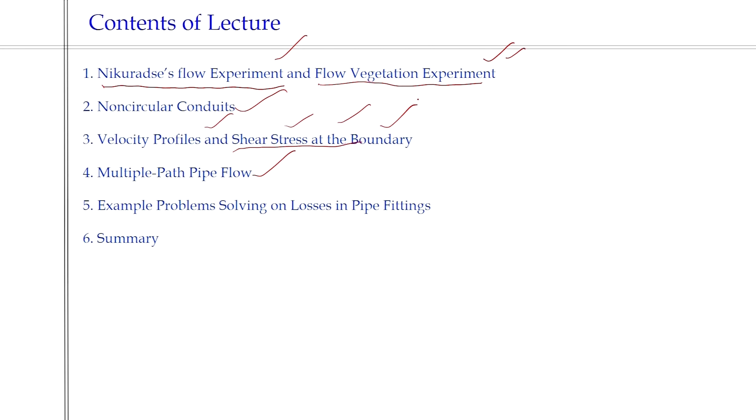Now let us come back to today's contents, what I am going to deliver to you. Very interesting experiments which were conducted almost 90 years back - that is what we will discuss here, and the new experiment we are conducting at IIT Guwahati, a glimpse of which I will show you. Then we will talk about three things: non-circular conduits and how we can apply the same equations for non-circular conduits, how velocity varies in a pipe flow and how to compute wall shear stress at the boundary, and also how to solve multi-path pipe flows. Then we will solve some GATE questions on fluid flow through pipes, and we will have the summary.

Now let us come to the previous lectures, the recap. As shown in these figures, whenever you have any pipe flow components like pumping systems and reservoirs, please draw the energy gradient line and the hydraulic gradient line. Those two lines indicate where the energy loss is happening and where the energy gain is happening. For example, if you talk about a pump, because of the pump's resistance we get extra energy added to the fluid flow through the pipe systems.

That is the reason I repeat this to tell you: first you draw a datum and you have the reservoirs, and from that reservoir you start drawing the energy gradient line and the hydraulic gradient line. The difference between the hydraulic gradient line and energy gradient line is the velocity head, that is V squared by 2g. So on any datum I can have Z as the potential head, then the pressure head, then the velocity head - these three components I can draw as lines like this.

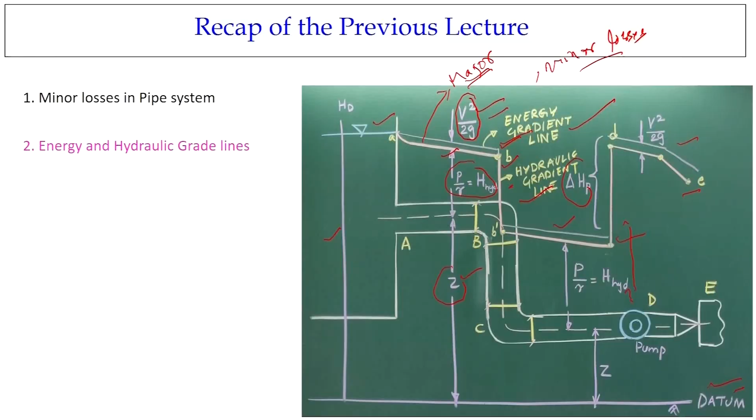Now let us come back to a very interesting experiment that happened in the 1930s, much before World War II. A German professor used to do simple experiments - one of the classical experiments conducted in pipe flows - which helped convert this complex flow into simpler empirical-based energy loss quantifications, velocity distribution quantifications, as well as wall shear stress. If you look at this, any pipe flow can be laminar flow, turbulent flow, or transitional in between laminar and turbulent flow.

The experiment conducted by Nikuradse is based on a very simple concept: take a pipe and put a roughness on it, an equivalent roughness made from sand grains. The figure shown with a 20 times zoom shows that the sand grains are quite random, roughened or placed in such a way that it creates roughness on the wall of the pipe. This roughness is represented as r, the roughness height, and R is the radius of the pipe flow. Because of this roughness, the flow characteristics can change.

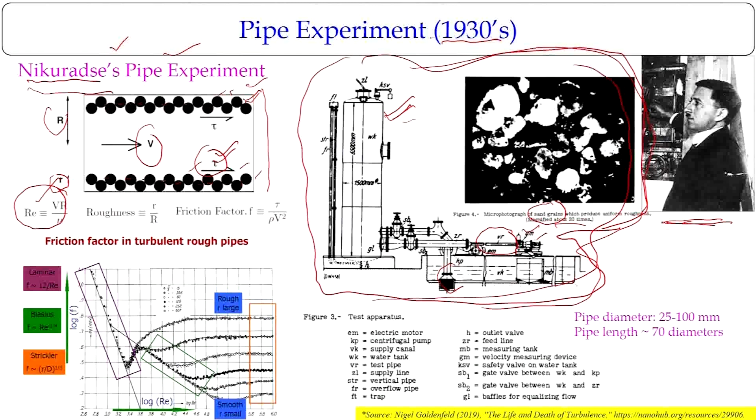As you can understand, this experiment was conducted in the 1930s, and in a remarkable way we got relationships for turbulent rough pipes: friction factor versus flow Reynolds number, which gives us three key cases.

One case is when R and the Reynolds number are both too large, the friction factor becomes a function of R by D, the roughness factor. When the flow is laminar, it is a function of the Reynolds number. And if you have a smooth pipe where the roughness is very small, R is very small, then you follow the Blasius equation, which is a function of the Reynolds number.

By conducting a series of experiments, Nikuradse finally derived the friction factor relations with the Reynolds number, the Moody chart, which we have been using for designing pipe flow networks in industry, water supply, and sewage treatment plants. We still use the same equations developed back in the 1930s from those turbulent rough pipe experiments, since this is still very complex to simulate in CFD.

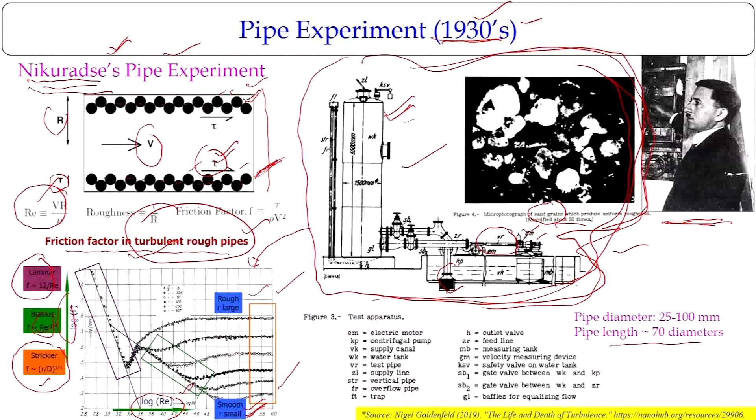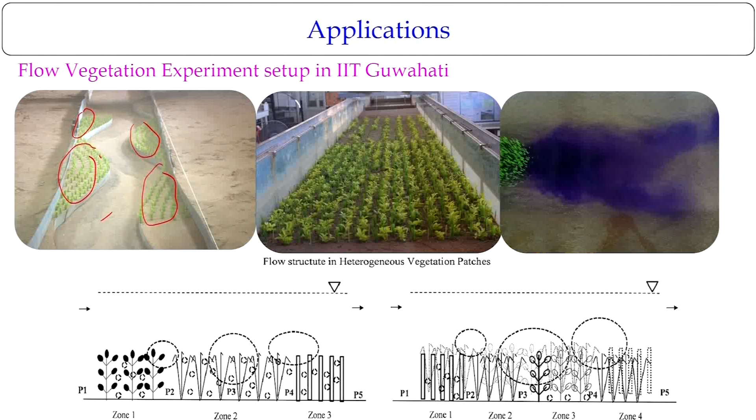Now, coming back to what we have been doing at IIT Guwahati, we do a similar sort of work creating roughness in open channel flow. You can see vegetation being used to create roughness to some degree, and we try to measure the velocity distribution, quantify the wall shear stress and bed shear stress, and measure the water slope.

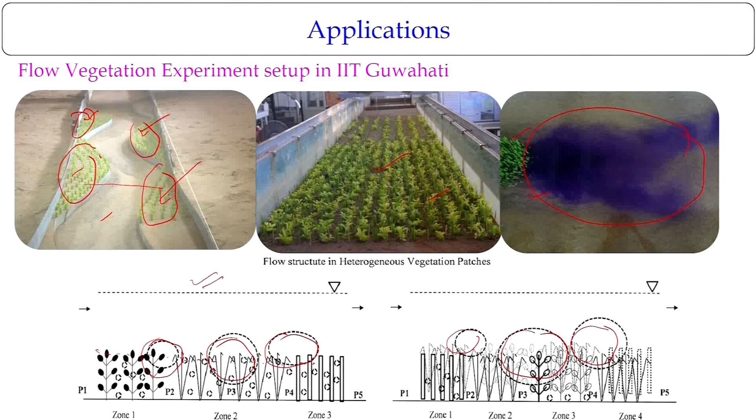We introduced roughness and studied these roughness behaviors and how flow dispersion happens using color dyes. For submerged flow conditions with this kind of roughness, vortices and eddies form, and we can quantify the strength of these eddy formations through a series of experiments in this flow.

So what I want to convey is that experiments give us a lot of confidence for very complex problems like turbulent flow in rough pipes, which is still very difficult to model in CFD software. But by conducting a series of experiments, we can establish empirical relationships, and these empirical relationships are generally used in industry to design pipe networks.

Now coming to another case: many times we do not deal only with circular conduits or circular pipes from one point to another. When you go for a non-circular case, you need to define an equivalent flow diameter.

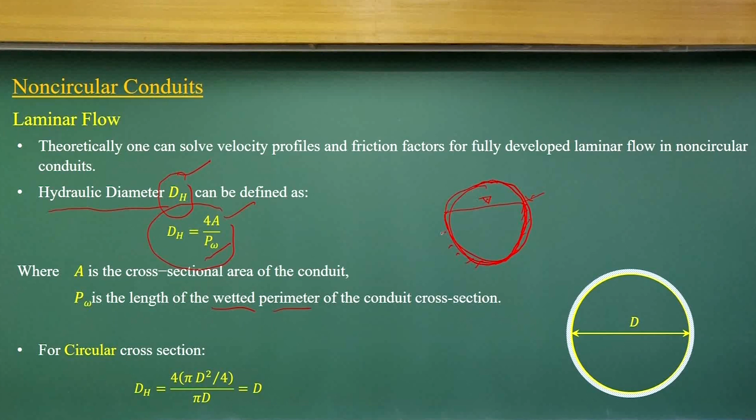So that means we introduce a hydraulic diameter, which is a function of area and wetted perimeter. The part of the perimeter which is under wetted conditions is called wetted perimeter. For example, if the flow in a pipe is full, the total perimeter is considered the wetted perimeter. But if the pipe flow is half filled, I will consider only the wetted part. I am highlighting that we need to consider the wetted perimeter and the area to compute the hydraulic diameter.

As equivalent diameter we can get it. For circular sections, if you substitute D as the diameter and the perimeter for the full flow of the pipe system, you get the hydraulic diameter in a circular pipe when it contains full liquid flowing through it, equal to the geometric diameter. So that is how equal components come for that. Please do not be confused - the hydraulic diameter is an equivalent diameter representing other non-circular conduits.

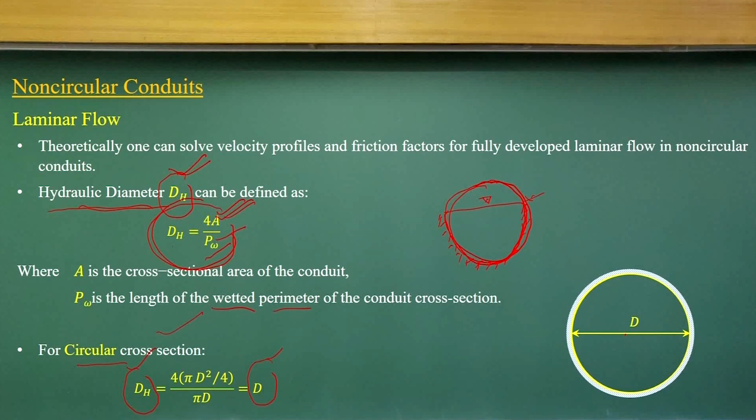Now come back to the non-circular conduit, like a condition where flow passes through a circular annulus. You have D1, D2 and flow through these. You can easily find out what will be the flow area and the wetted perimeter for both cases, which gives the hydraulic diameter. Similarly, if I have a rectangular cross section and flow through it, I can define the area and wetted perimeter, which gives the hydraulic diameter.

If you have an isosceles triangle with 2 alpha degrees between sides R, I can also numerically determine the area and the perimeter, and get the hydraulic diameter for these cases.

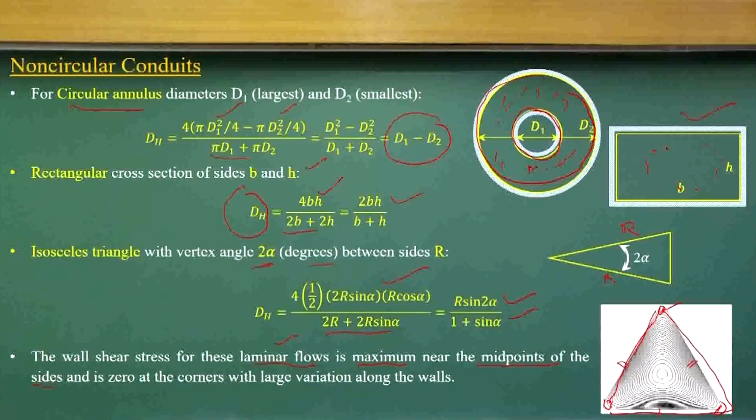Now let us come back to non-circular pipes, like if you have a pipe of triangular shape. In this case, if you have laminar flow, the wall shear stress will be maximum near the midpoint of the sides, and it will be zero at the corners. More details I am not going into since it is undergraduate level and we did not discuss much detail of flow patterns for complex geometry like isosceles triangles - you can see the maximum wall stress develops at the midpoint, and it is zero at the three corner points.

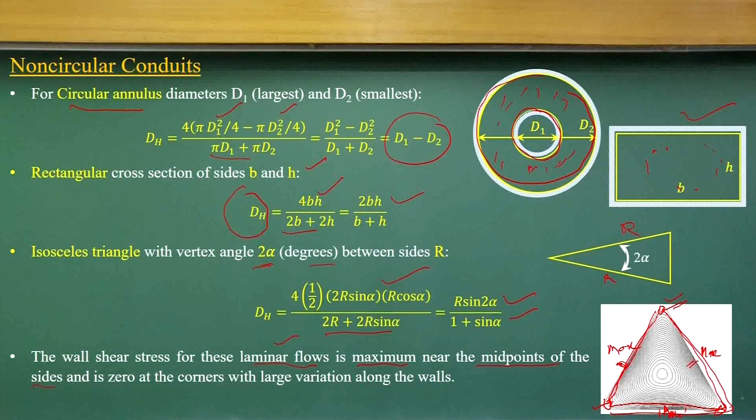Now if you look at turbulent flow, the velocity distribution as well as the wall shear stress distribution changes. Even for turbulent flow we use Moody's diagram, replacing D with hydraulic diameter, to quantify the energy losses. The wall shear stress is zero at the corners, as already told in the laminar case. Along the side, the wall shear stress is close to uniform, not maximum at the midpoint as in laminar flow. This is the flow behavior observed by conducting a series of experiments quantifying the velocity distribution and wall shear stress.

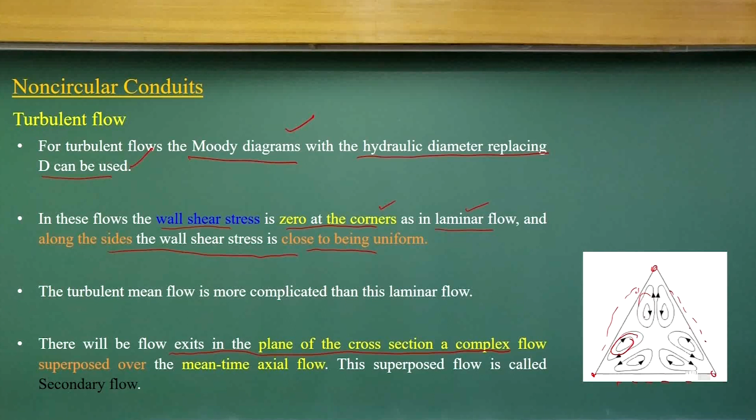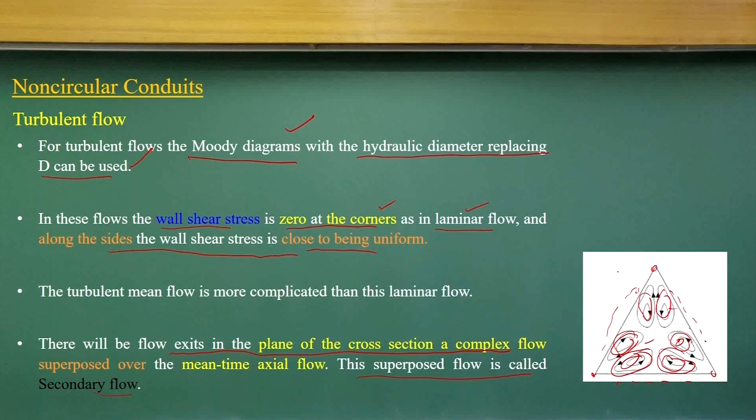Now if you look at this type of flow, you always have vortex formations. These vortex formations are called secondary flow generations, and they are responsible for mass exchange and momentum exchange through the flow system. As you go away from circular pipes, for a case like triangular flow zones, you have a more complicated velocity distribution and shear stress distribution compared to circular pipes, which are symmetrical problems that we try to understand.

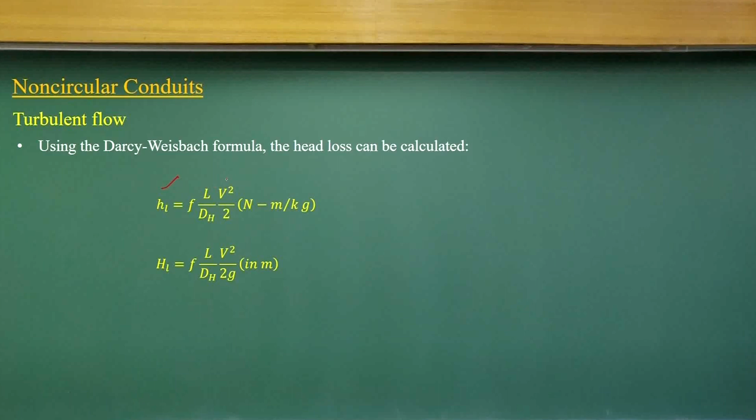Now coming back to turbulent flow, again we can follow the same head loss equations. The head loss is a function of the velocity head, which is L by dH, where dH is the hydraulic radius, L is the length, F is the friction factor, and we can compute the energy losses.

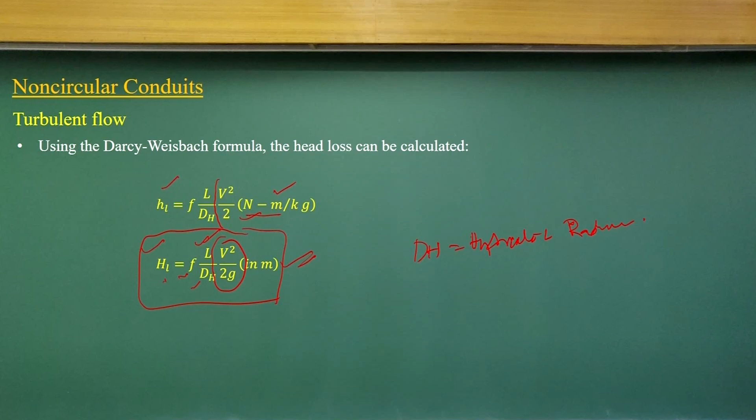Most often we use these because this gives the energy losses in terms of meters, but we can use these functions which give us terms of Newton meter per kg. So we divide by the acceleration due to gravity, we will get it in terms of meters.

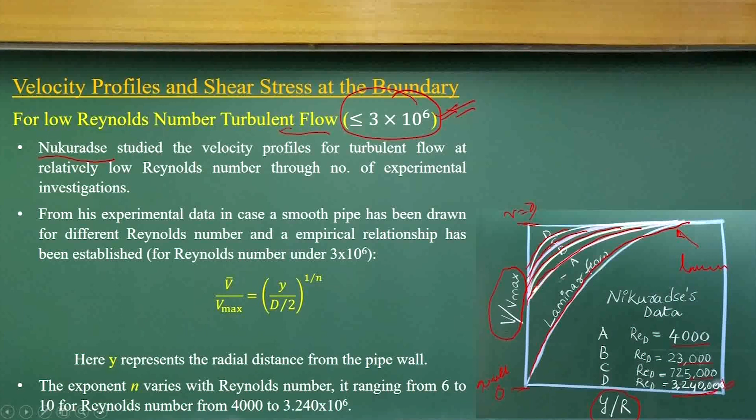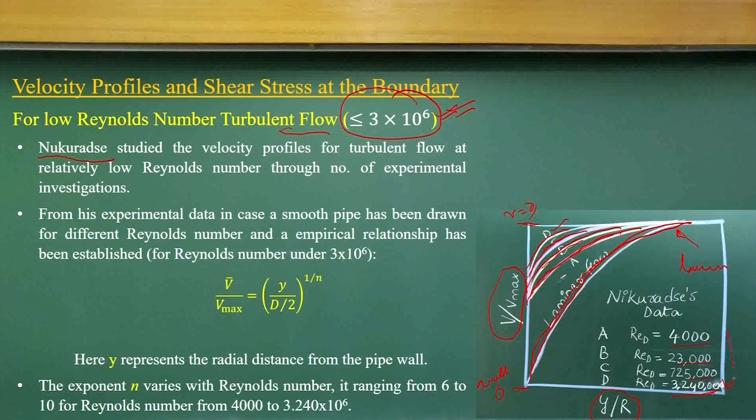In case of laminar flow, you have a velocity distribution like this, but in case of turbulent flow, the velocity distribution changes as we increase the flow Reynolds number. So to quantify the relationship for this type of velocity distribution v by v max, it establishes a relationship with y by (d by 2), or y by radius, to the power 1 by n.

It is fitted with a data curve, and finally we find that n varies with the Reynolds number. Its range is from 6 to 10 for Reynolds numbers from 4,000 to 3.2 million. So in this case n varies considerably from 6 to 10. This n is a function of Reynolds number.

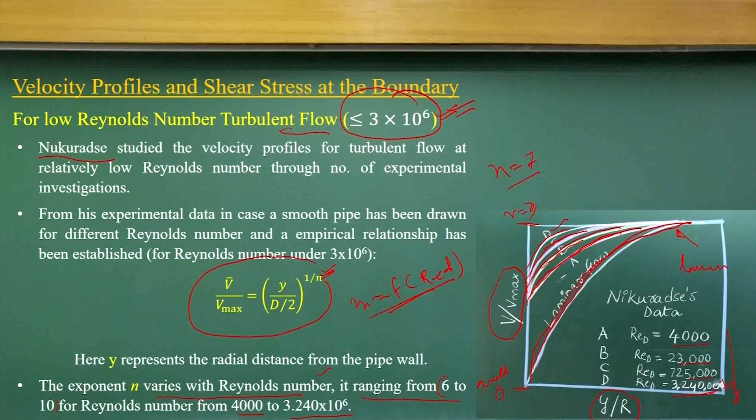But in many cases n is considered as 7, so many times it's called the 1 by 7th rule for describing the velocity distribution in a pipe flow for turbulent regions. But when you look at what could be the shear stress, that is the wall shear stress at the wall of the pipe.

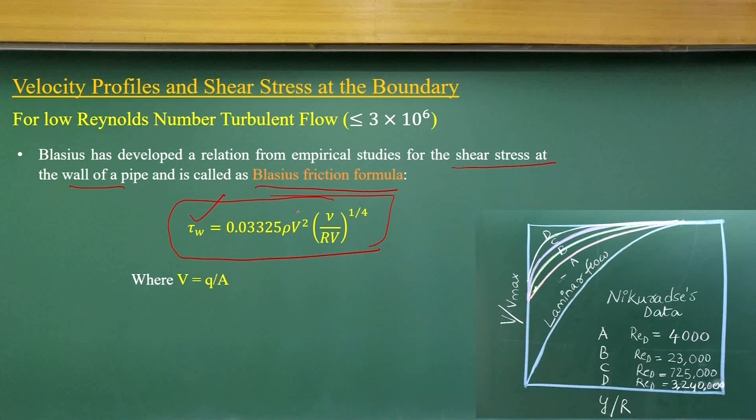That is also empirically established as a function of wall stress, the average velocities, hydraulic radius, and the kinematic viscosity. That is developed to compute the wall stress from experimental data sets. From experimental data sets it is derived, that's why it's called empirical studies. The wall stress relation with average velocity, kinematic viscosity, and the R value gives the wall stress for a circular pipe.

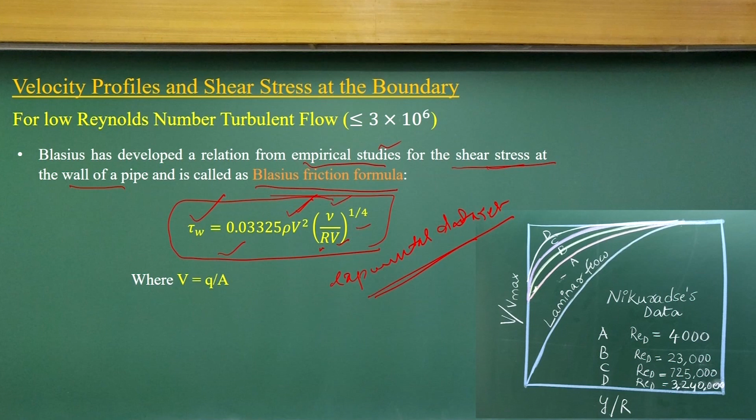Now if you look at it, when you go for higher Reynolds number turbulent flow, more than 3 million, what actually happens—I am not going into more details—is that when you have Reynolds numbers more than 3 million,

then certain zones of the velocity profile develop. Like at the wall, you can see there will be a flow which behaves like laminar flow, like a viscous sublayer. And as you go to the outer zones, you will see a velocity profile develops which does not have a linear relationship. In laminar flow, there is a linear relationship between shear stress and velocity distribution, but that does not happen when you go to the outer zones.

And in between there is an overlap zone formation. In this lecture we are not going into more details because I have not introduced the boundary layer concept yet, but try to understand: when you go for higher Reynolds number flow, you will have a very small thickness near the wall where the flow behaves like a layer dominated by viscosity—that's why you have viscous sublayer zones. But as you go far away from the wall, you will have a turbulent velocity profile zone, and experimentally it's established that this change of regions happens as we go away from the wall.

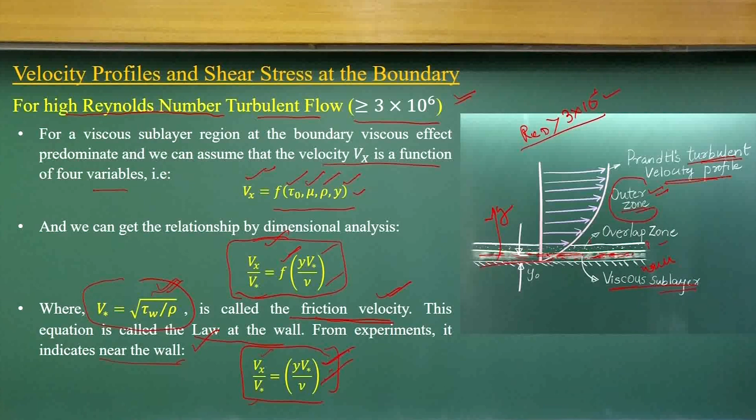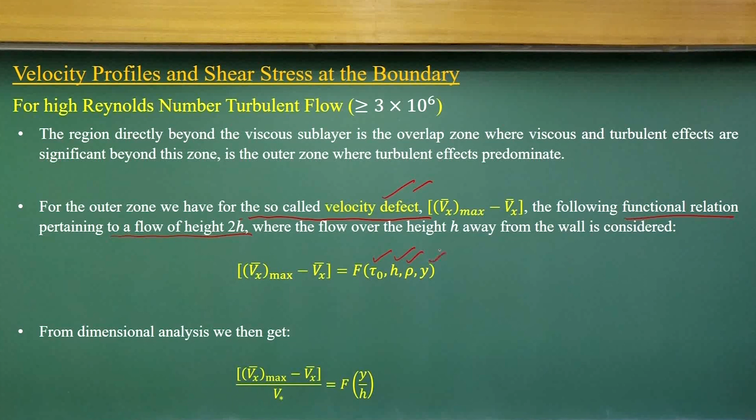But if you go to the outer layers, we look at the velocity defect concept: how far the velocity is from the maximum velocity, meaning how much deviation or difference there is. Looking at the functional relationship with shear stress, H, rho, and y, we again get similar functions from dimensional analysis between V, y, and h.

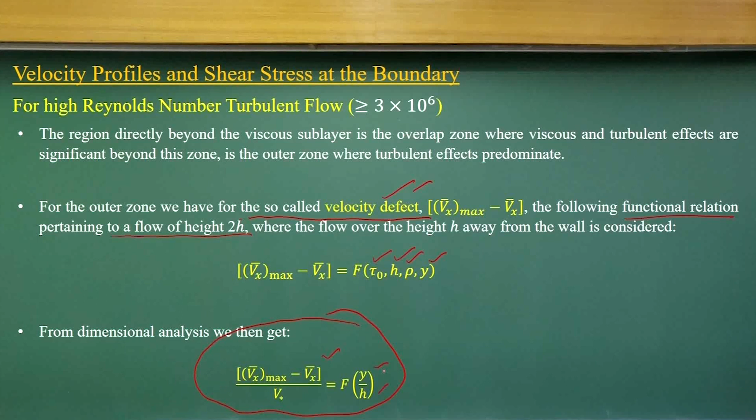Now, for high turbulent flow, this region is called the velocity defect zone, and h is replaced by r, the pipe radius. Then you get these experimentally derived components, where alpha equals 0.4, representing how the time-averaged velocity and spatial average velocity fluctuate with shear velocity. In the overlap zone, you get this equation.

From experiments and dimensional analysis using the Nikuradse experiment dataset, it was found that alpha equals 0.4, and for the overlap zone, alpha and B take different values—this is called the logarithmic overlap layer. Between these two regions, we can look at how the velocity distribution behaves.

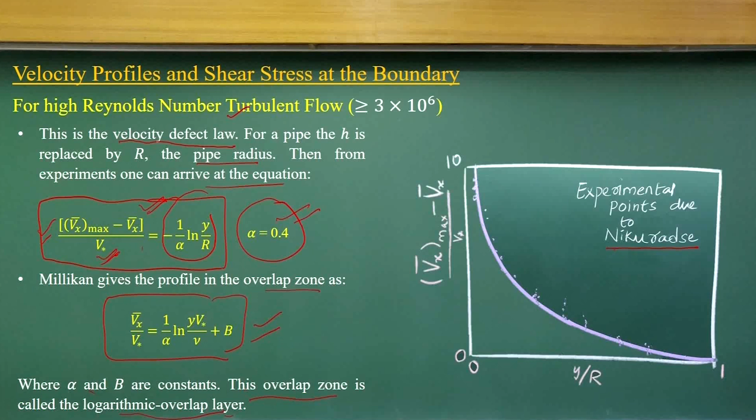Now coming back to a very simple example, which is necessary and found in your textbook: many times you have pipes in series, pipes in parallel, or three-reservoir junction problems. Pipes in series are very simple problems, like electric circuits.

You can have a series of pipes, like wires, from point A to B. If you have that, definitely the discharge will be equivalent for steady flow conditions, so Q1, Q2, Q3 should be equal since it's steady state.

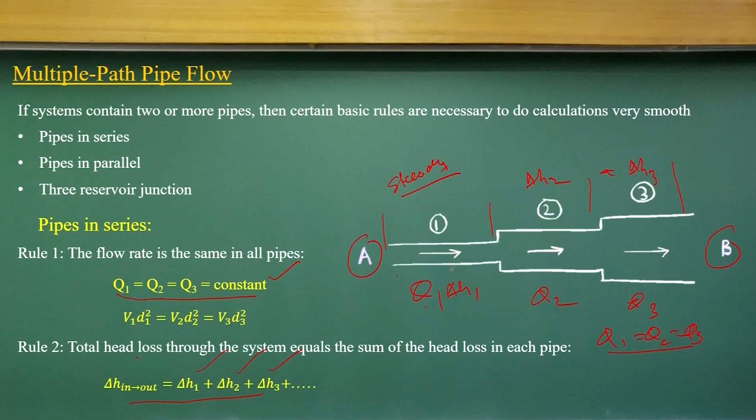But there are energy losses: delta H1 is the energy loss for one region, delta H2 for another, and delta H3 for another. The total energy loss is the sum of delta H1, delta H2, and delta H3. So pipes in series is a very simple problem where flow is constant, but total head loss is the sum of head losses of individual pipes connected in series.

But when you have pipes in series, remember to always consider whether there are minor losses. There are major losses, which are the frictional loss component for pipe 1, and also minor losses due to changes in pipe diameter—expansion, contraction, exit loss, entry loss. You have to look at how the flow is happening and quantify the minor losses.

So this is major loss plus minor loss, representing pipe 1, pipe 2, and pipe 3 respectively. Similarly, with more pipes, you just sum the head losses along pipe 1, pipe 2, pipe 3. Most of the time, since the same discharge flows through, V2 and V3 will be proportional to V1 as functions of that same discharge.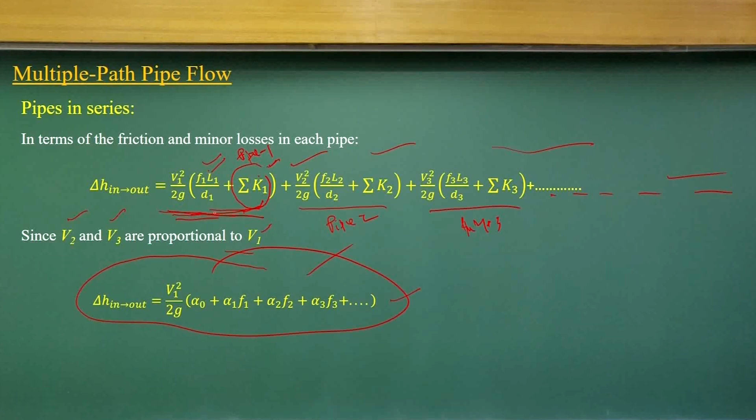So, you can write a simple formula like this, V1 square over 2G, and have constants with this value. These are shortcut ways to do it, but I always encourage you to follow the energy losses computations for major losses and minor losses, compute the total, then find out what could be the energy losses happening in a pipe in series conditions.

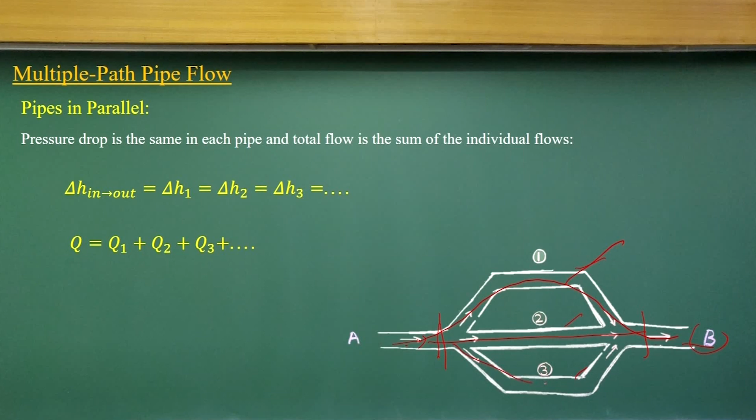Now, if you look at another very simple problem, pipes in parallel. When you have pipes in parallel, you can understand it: if I have 3 pipes connected here, this is A, the entry point, B is the exit point. From this point to this point, the total energy losses passing through path 1, path 2, or path 3 should be equal.

So, energy losses should be equal, whether it follows path 1, path 2 or path 3, all the energy losses should be equal. That is the condition. As the flow comes and divides into 3 parts, we can write Q1, Q2, Q3, and QT will be the sum of Q1, Q2, Q3. So, the sum of discharge will give us the discharge passing through A or B, and the energy losses, whether following path 1, path 2, or path 3, should be equal.

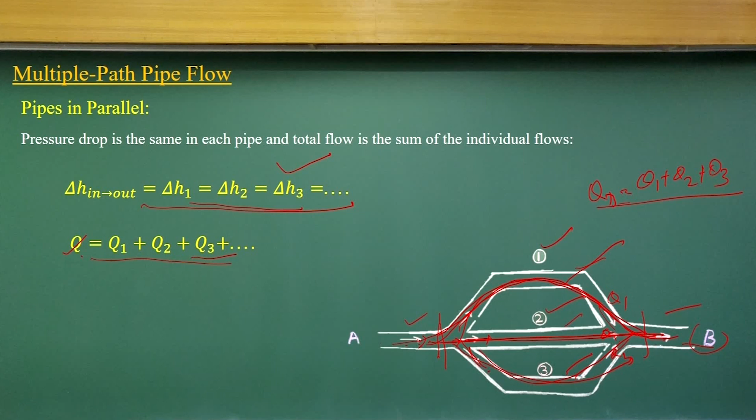Then the energy at these 2 points will come to the same value, although it would not be possible to have different energy losses, that cannot happen in a flow system.

Now, if you look at the 3 reservoir junction problem, which is given many times, you have multiple reservoirs, multiple water tanks connected to 3 flow systems, and you have a junction where 3 are connected. Out of these 3 flows, one could also be outflow. We do not know in which direction it will be outflow, but we can say that the sum of Q discharge should be equal to 0 at this point, since there is no outlet. So, at the junction point, the continuity equation or mass conservation at this point should be equal to 0.

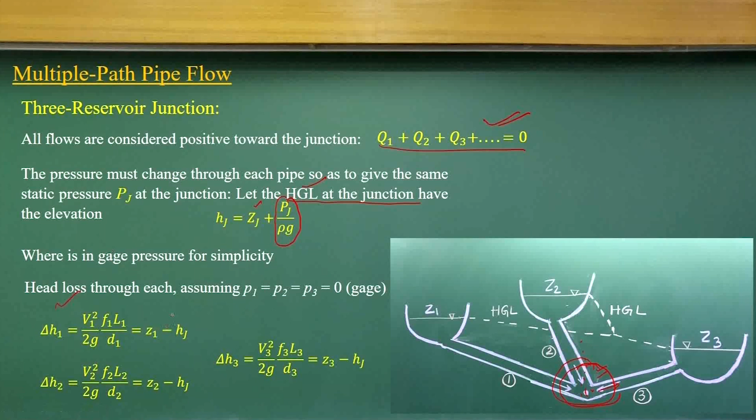But another thing you need to compute is how much energy or head there is, what is the elevation of the hydraulic gradient line, that is ZJ, and the pressure head part that comes. This hydraulic gradient is supposed to be equal to the change of energy. We have this energy gradient line at this point, and I know the hydraulic gradient line at these points. If I look at how much head loss is happening, the pressure head is equal to 0 here, the velocity head equal to 0 here.

So, this is the energy gradient line, also the hydraulic gradient line. Looking at the line of hydraulic gradient, not the energy gradient line, since I am not looking at the velocity point, that should be equal at this point after having the energy losses. That is, Z1 minus HJ should be the energy losses. Similarly, Z2 minus HJ should be energy losses, Z3 minus HJ should be energy losses. So, the energy losses will happen in such a way that we will have a hydraulic gradient at the junctions.

That is what we apply, with losses, to compute the head losses in this direction, in this direction, and in this direction. Based on that we can compute the flow contributions, Q1, Q2, and Q3 directions. So, you have 3 equations here, and these equations help us find the flow directions and the head losses of the 3 reservoir junction problem.

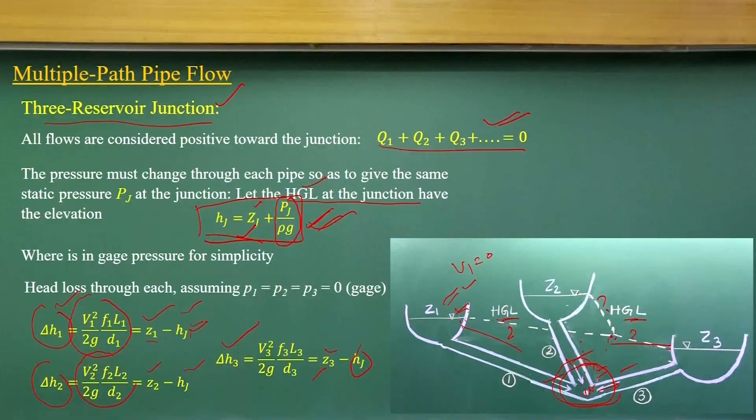This is quite an interesting problem, but try to understand that we are computing the hydraulic gradient line and its location at the junctions, and based on that we are equating the energy losses to compute that part. That is the basic component.

Now, come back to example 1, which is a GATE 2014 question paper, which looks very lengthy, but it is a very simple problem. An incompressible fluid is flowing at a steady rate in a horizontal pipe.

From a section, the pipe is divided into 2 horizontal pipes given as D1 and D2. D1 is 4 times D2, running for a distance L each other, then again joining back to the pipe of the original size.

You just sketch the problem. Many times please sketch the problem, then you can understand it.

For both parallel pipes, assume the head loss due to friction only, that the friction factor F is constant. What could be the velocity ratio between the bigger and smaller branched pipe?

If you look at this problem, as we solved earlier, we follow the basic concept of one dimensional steady flow, incompressible, neglecting minor losses, only friction losses considered. As it is parallel pipe flow, the head losses of pipe 1 and pipe 2 should be equal. This is a very simple thing. F is constant, and the head losses between pipe 1 and pipe 2 should be equal.

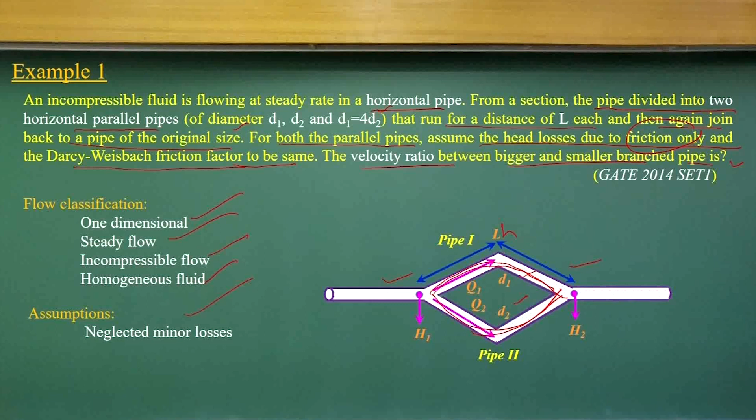Based on that you can compute what could be D1, D2 ratio, since it is known to us, we have to compute the velocity ratio. If you look at it this way, it is very simple: the head losses between section 1 and 2 for these two pipes, if I equate it, I will get the ratio of the velocity. That is what the problem asks.

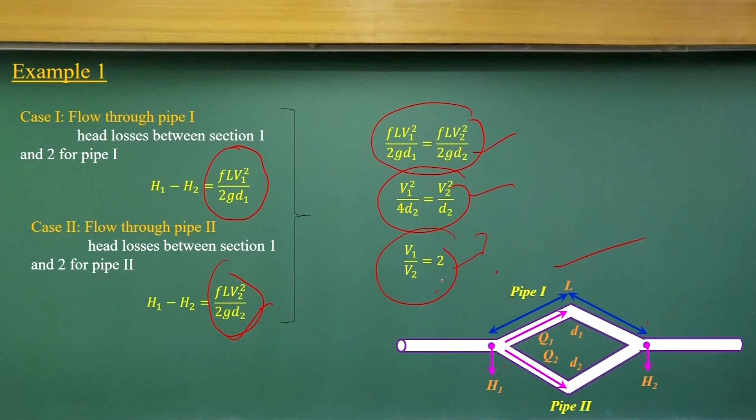Even if I do not need the continuity equation to show it, only with the help of the head losses between sections being equal for parallel pipes, if I equate it, I will get the ratio between velocity V1 and V2. That is the point we will derive.

Another problem, which is a GATE 2014 question: a straight 100-meter long raw water gravity main carries water from an intake to a jack well of a water treatment plant. Basically there is an intake that takes water from the river or groundwater and goes to a jack well, where basic screening is done, and then it goes to the water treatment plant. The required flow through the water main is given to us.

The allowable velocity is given to us as 0.75 meter per second, F is given, G is given. What could be the minimum gradient to be given to the main, so that the required amount of flow passes without any difficulties?

You just sketch the problem: 100 meters, there is an intake, and the jack well, where Q is given to us, and also the allowable velocity is given, meaning this is the maximum velocity that can go through this pipe. What could be the minimum gradient given to this pipe, so that the required amount of water can go to the jack well from the intake well?

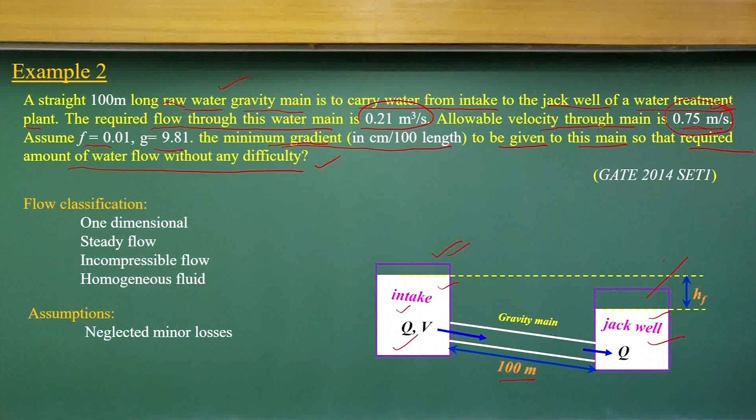The problem, if you look at it, looks very difficult, but it is not. What we are looking at is how much energy loss happens when flow goes from A to B because of frictional losses, how much energy loss is happening, and whether we can provide a gradient such that it maintains the flow.

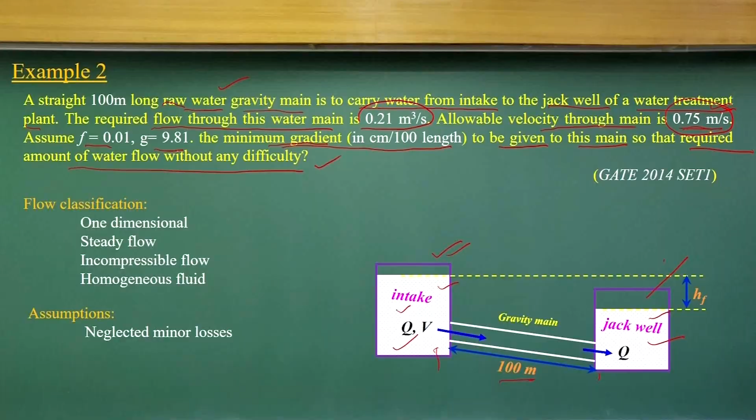That means you compute the energy losses, multiply it with the length, which gives the total energy loss happening. And if I know the total energy loss, then I can know what gradient, or potential energy head, I have to provide to have this flow system.

Again I need to repeat this to make it clear: the problem is framed a bit differently, but try to understand it. What we are looking at is what could be the minimum gradient to be given to this flow, so that water can flow from the intake to the jack well.

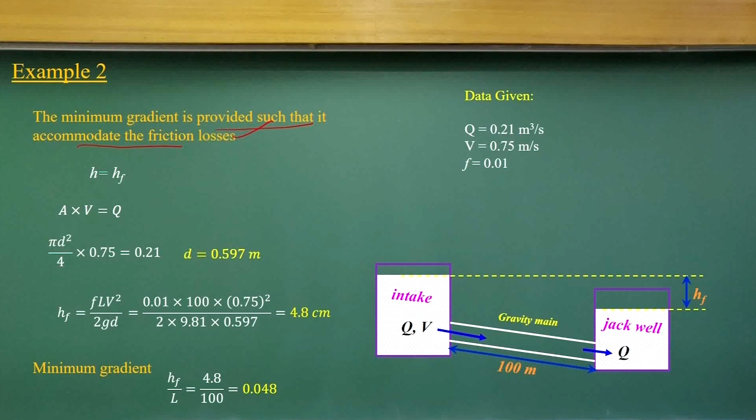When flow goes through this pipe, there will be frictional losses, energy losses due to pipe friction. Those losses should be overtaken by the potential energy gradient we have to keep. That is the problem: the potential energy gradient to be provided with respect to the energy losses that will happen. If you do not provide the minimum gradient, water will not flow through it. That is the very basic concept here: the minimum gradient is to be provided such that it accommodates the frictional loss. That is the trick of the problem.

Since the velocity is given and Q is given, we know what could be the diameters using the continuity equations, very simple things. You also know what could be the energy losses.

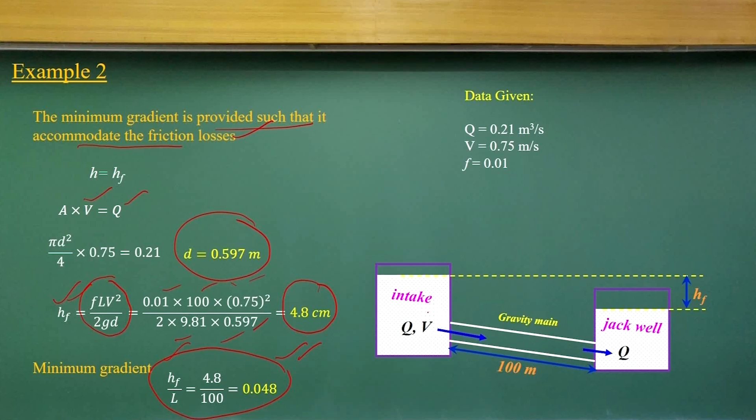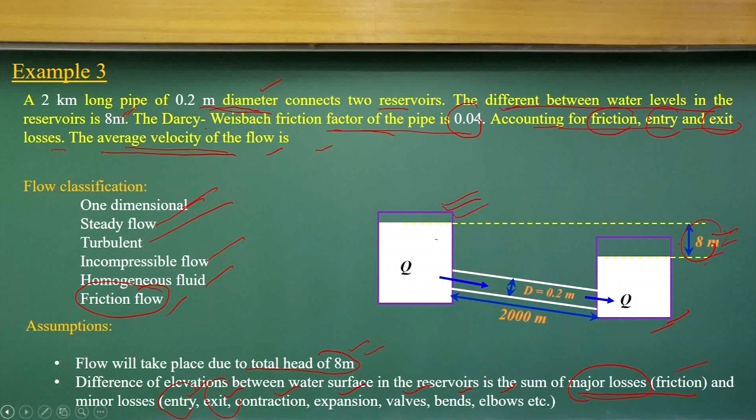Accounting for friction, entry and exit losses, we have to estimate the average velocity of the flow. The flow will take place with total energy losses of 8 meters, and the difference between these energy losses will account for major losses, which are friction losses. The minor losses here are the entry and exit losses. That is the additional thing we will consider, but other losses will not be considered in this case, as given in the problem.

So the friction factor data given is the length of the pipe, the diameter, and the total head losses. The loss coefficient in terms of velocity head, as you know, at the exit we consider as 1, at the entry we consider 0.5. Half of the velocity head is lost at the entry, and at the exit the total velocity head is lost. So this is 1, this is 0.5.

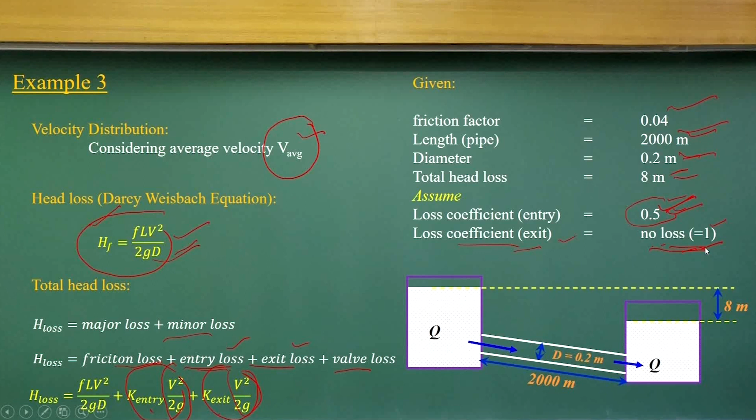Now we will apply the Darcy-Weisbach equation to compute the energy losses for the major losses, the pipe flow due to friction, and the minor losses, entry and exit losses. These are the coefficients we use in terms of velocity head, and here we have considered 0.5 and 1.

By substituting these values we get a series of equations like this, and substituting further you get a quadratic function. Solving that you get the velocity. So if you look at these problems, it is quite easy, you just have to remember the coefficients, the loss factors used for computing the entry loss and the exit loss. The exit loss is the total velocity head, while half of the velocity head is used as the loss at the entry level. Otherwise this is quite a straightforward numerical problem to solve.

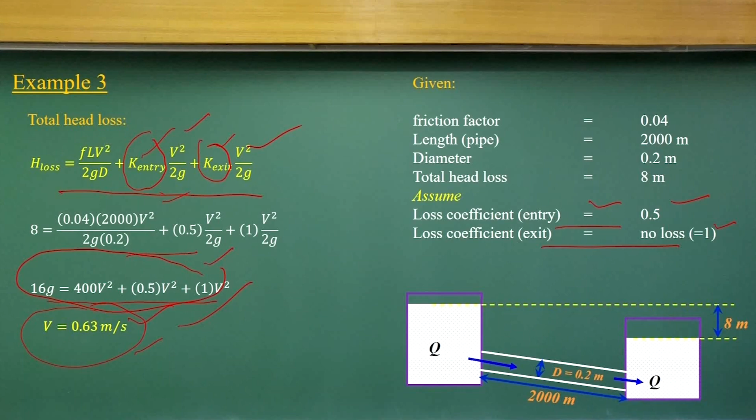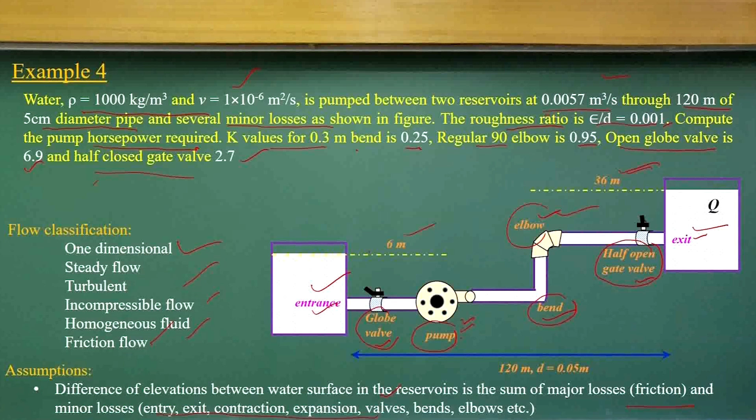As usual we will have flow classifications, in this case one dimensional flow, and here we have frictional losses and losses considered for the entrance, valve, bend, elbow, and exit. All these loss components are given, and we are looking at what could be the pumping requirement.

Since the roughness factor is given to us, we need to compute the friction factor from Moody's chart, which requires the Reynolds number. So first let us compute the average velocity and the Reynolds number for this flow. Diameter is given, velocity is given, then we can get this. With these Reynolds numbers and roughness factors, we will get the value of the friction factor from Moody's chart.

In general design, we compute the Reynolds number. Then for given roughness factors, we can get from the chart what will be the friction factor value.

Then we account for all the loss components in terms of velocity head - entry, valve, bend, elbow, half valve and exit - which total 12.3 in terms of velocity head. This is the sum of the energy loss factors: entry is 0.5, exit is 1, and these values are given to us, mostly in tabular form, from a series of experiments.

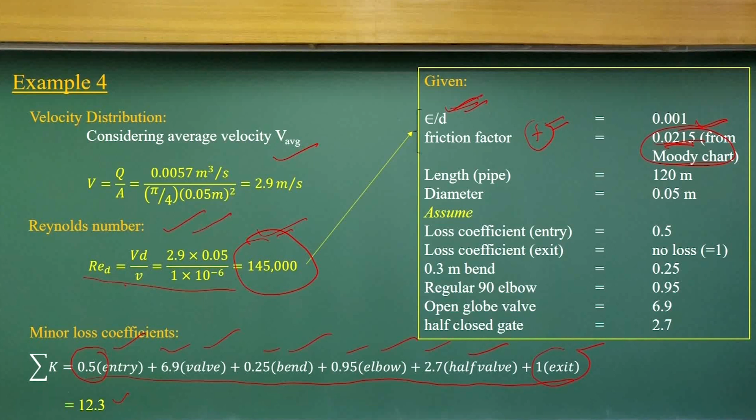Any industry gives this value - what is the range of the energy loss coefficients for the bend, valve, elbow. It is generally given by any pipe manufacturing company.

Now, what we do is apply the energy equations with head loss. Since V1 and V2 are equal, the kinetic energy term becomes zero, and solving for the pumping head gives the elevation difference plus the major and minor loss components. This gives the head requirement at the pump, which comes out to be 57 meters - accounting for the loss component and the elevation, the potential head needed from 6 meters to 36 meters.

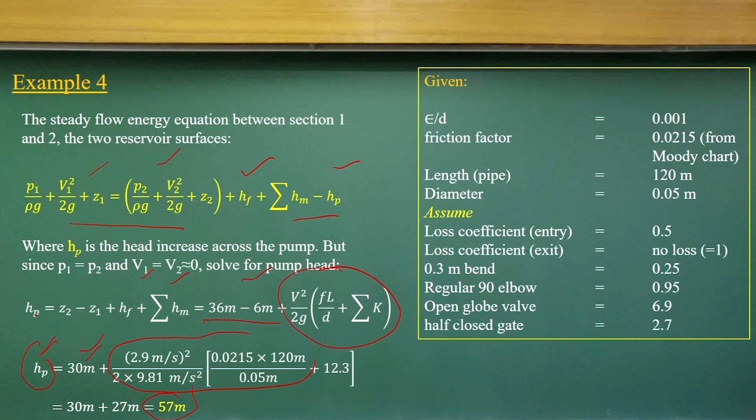So for lifting 57 meters, how much power is required? It is simply rho g Q Hp - this gives the power requirement to lift this mass flow rate, rho and Q being the mass flux, multiplied by Hp. In terms of HP, we get 4.3 HP power requirement to lift the water up 57 meters.

Considering any pumping center has an efficiency of 70 to 80% - you cannot have 100% efficiency - and considering this 4.3 HP power requirement for design purposes, we can consider a 6 HP pump sufficient for this pipe flow system of two reservoirs connected with a 30 meter difference, accounting for the energy losses.

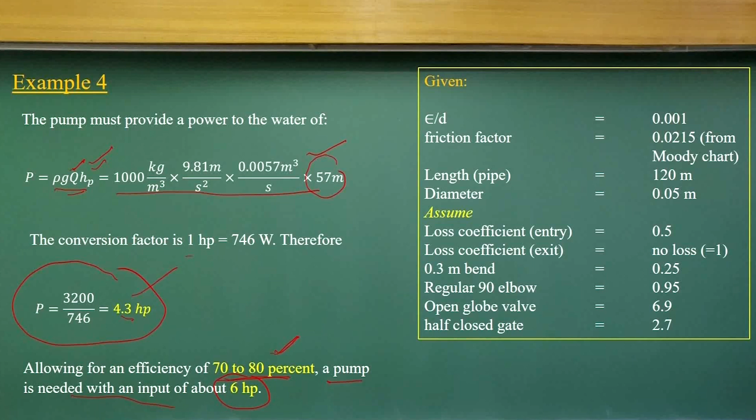So this is how we generally use a design problem to solve piping system design, with additional energy like pumping, or in hydropower projects where we put turbines. The basic concept used is the energy gradient lines, the Moody charts, and the Darcy-Weisbach equations to solve these problems. With this, let me summarize the problems discussed today.

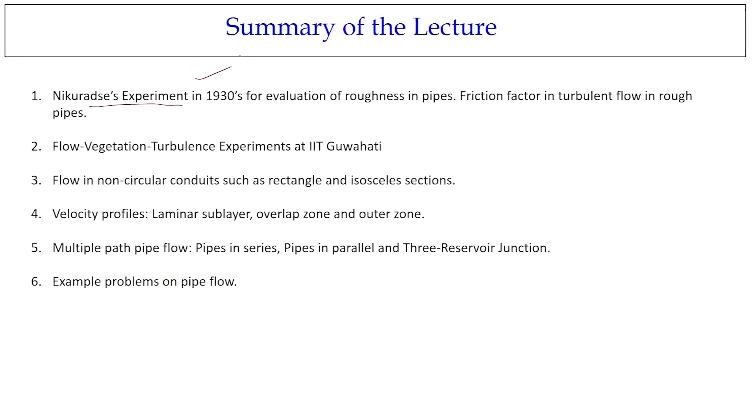Starting from the 1930s, Nikuradse's experiment - one of the finest experiments conducted back in the 1930s - gave us solutions to very complex problems like turbulent flow in rough pipes and equivalent energy losses in terms of friction factors, establishing relations that are quite interesting and inspiring, showing that a series of experiments can help us understand very complex turbulent flow in rough pipes.

We also showed examples of similar experiments we have been conducting at IIT Guwahati. I discussed non-circular pipes. We also discussed introductory levels, since we didn't go much into boundary layer concepts or turbulent flow details in these 8-week classes.

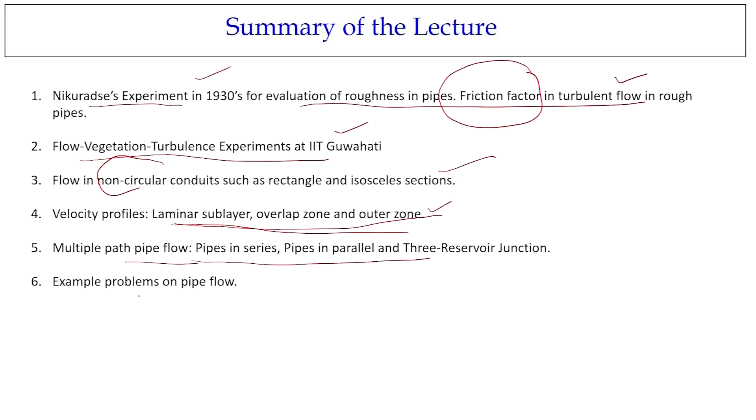So I gave you an introductory level understanding of velocity profiles, and at the end we talked about multi-path pipe flow - pipes in series, parallel, or with three-reservoir junctions - and solved 4 examples. With this, I wish to conclude this 8 weeks and 20 hours of lectures on fluid mechanics.